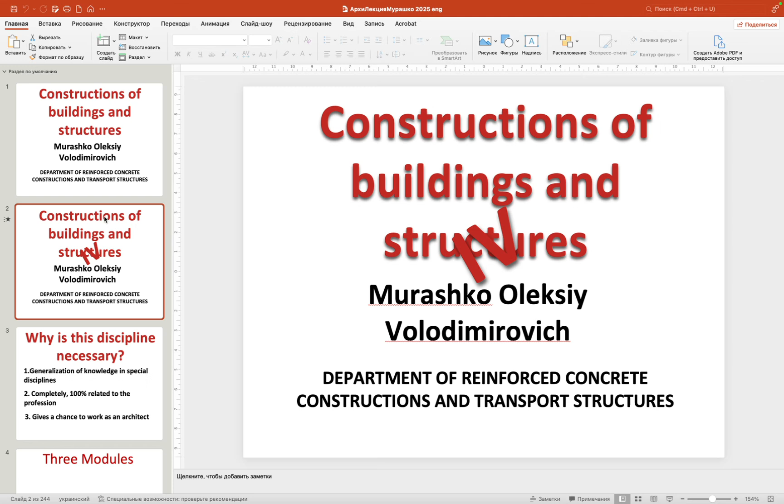And we have started. So, first of all, it is the fourth part of material of the lecture. So, some issues that I will tell you during this course you will find familiar, because you have heard something like that during previous courses while studying at the academy. So, the first question is: why is this discipline necessary?

First of all, it will help you to collect all the knowledge that you have in the structural direction together. It's just the generalization of knowledge in special disciplines, and it will collect all the structural disciplines that you have already considered, like strength of materials, constructions of buildings and structures, part one, two, three, etc. So it will help you collect the general volume of knowledge with which you will be able to work as a real architect, not only as a designer.

Also, it is completely 100% related to the profession, because all the issues that I will consider during these lectures are connected with real life, with practice. Some questions you will find hard to understand. It will be difficult for you to understand why an architect needs to know how to work in circumstances where you have to design the building in seismic regions or proof against landslides. But all these issues, like landslides, seismic regions, or, for example, undermined territories, are a part of our practice.

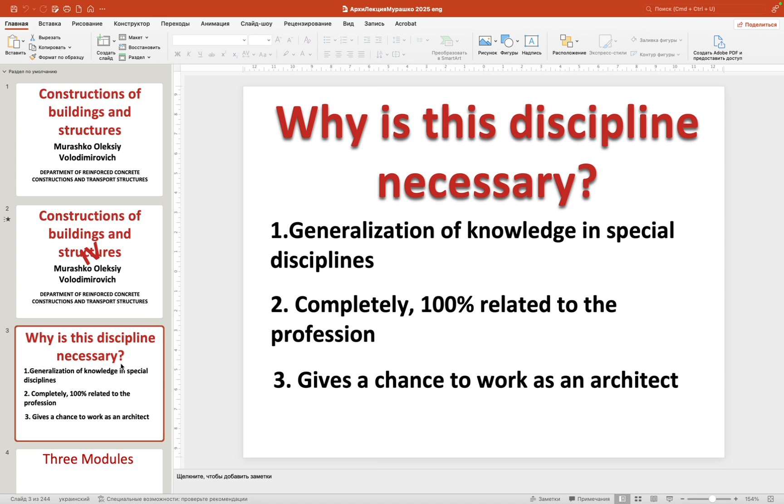So that is what makes my main architect a real architect, not just a creator of good pictures. So for you, when you work as the main architect, you have to be informed also in engineering and in structural elements, and including all this information, you have to create a good picture which can be implemented in the way you have described it on your picture.

So all my discipline will consist of three main modules. The first module will be devoted to construction solutions for residential, public, and industrial buildings. The second part will be devoted to difficult ground conditions. And the third section, which is like one lecture, will be devoted to reconstruction, because reconstruction is also a very important part of an architect's life.

And right now, during the war, it is one of the most needed directions of the designer's work, because we have a lot of buildings and structures in very difficult conditions after drone attacks, missile attacks, etc. So as a future architect, if you are planning to work in Ukraine, you have to be very well informed about reconstruction.

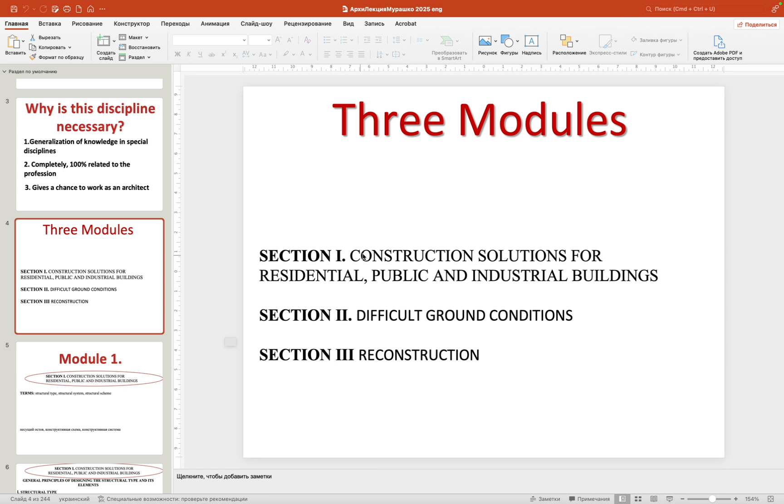So today we will start our first section, the first module, which will be devoted to structural solutions for residential, public, and industrial buildings. Yeah, the best way to write it is structural solution. So, do you have any questions for me about the intro that I just completed?

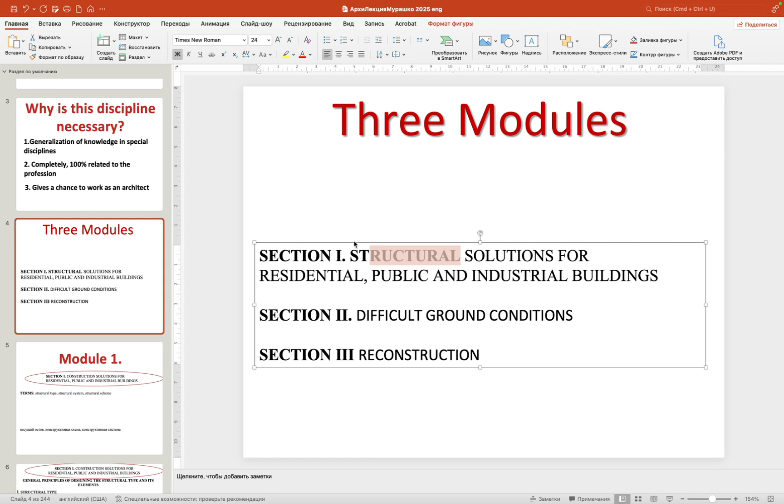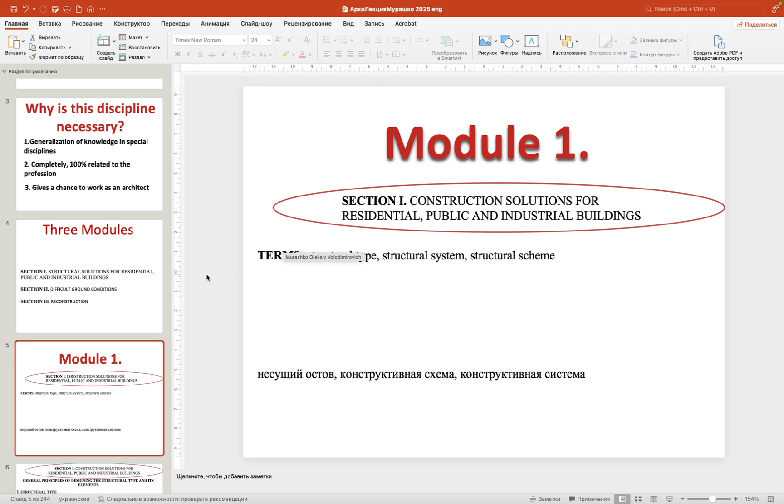The first module will start from the main terms that we will consider during our lecture, and some of these terms will sound familiar to you: structural type, structural system, and structural scheme. First of all, the structural type is a system of vertical elements like walls and columns, horizontal elements like floors, roofs, and beams, and arbitrarily oriented elements which support the spatial stiffness and geometric stability of the building. We will consider these terms further in the future.

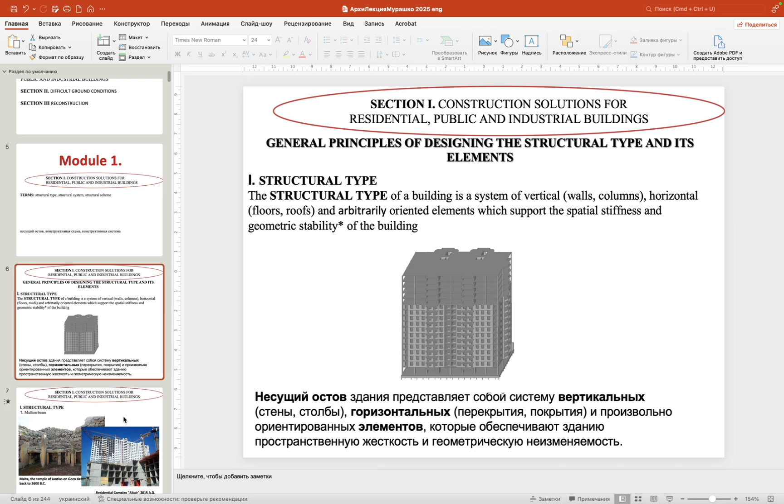And there are three main structural types. The first of them is called the mullion beam.

And if you will compare this mullion beam structural type, which was used in Malta 3.6 thousand years before Christ, and the contemporary residential complex Altair, which was erected in 2015, you will see a lot in common. Yeah, we can see that the materials are different. Here we can see the limestone, and here we can see load-bearing concrete, heavyweight concrete.

But nevertheless, mullion elements, vertical elements, and beams are located in the same order. So that makes it possible for us to call all these buildings mullion beam, because this structural type consists of vertical elements and horizontal elements. So it's mullion beam structural type.

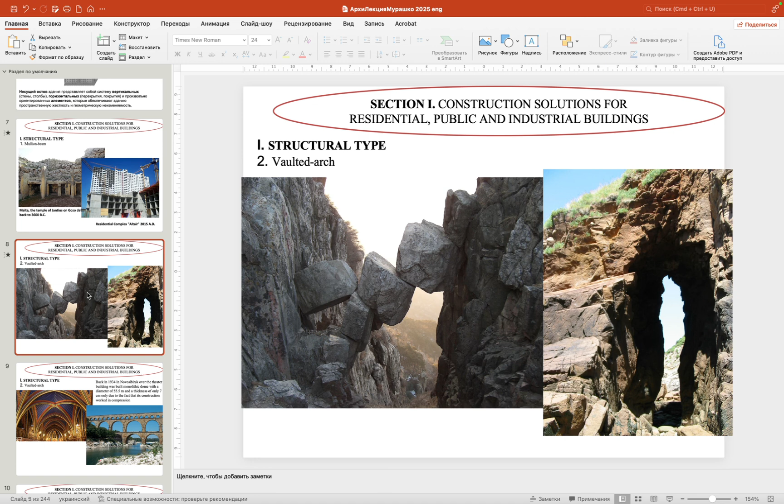The next structural type, which we will also consider during our lectures, is called vaulted arches. Sometimes we can find natural arches and vaults around us. Sometimes we can see the same ideas in various structural solutions like aqueducts and some other solutions which are used to cover religious or cultural buildings. So, mullion beam, vaulted arch, and the most modern, the most contemporary structural type, which is called suspended.

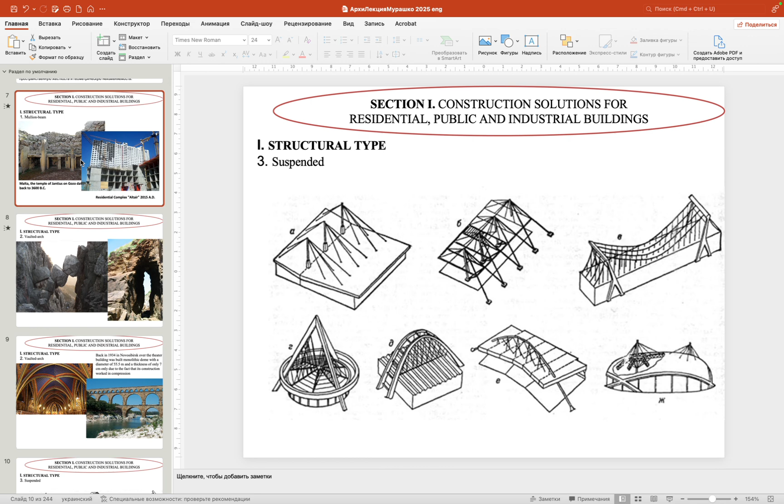So there are three main structural types, and all buildings and structures that we can see around us belong to one of these three structural types, and more than 90% belong to the first, mullion beam, because it is the oldest structural type, and it is the easiest structural type to erect, and that is why it is more widespread around the world compared to the other structural types.

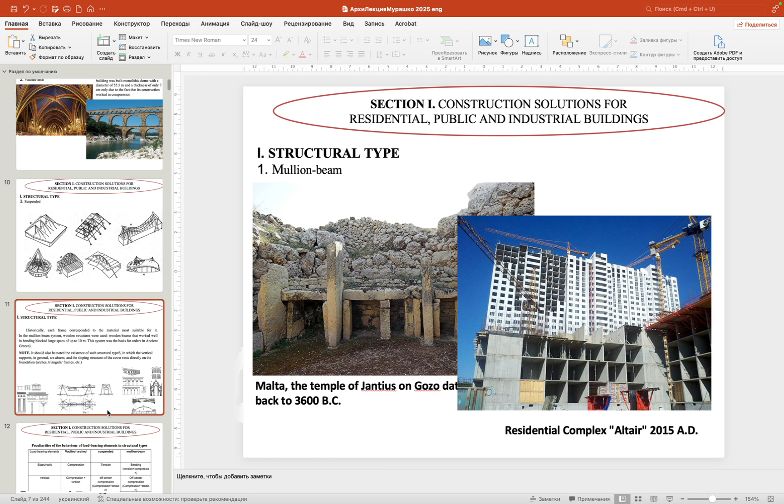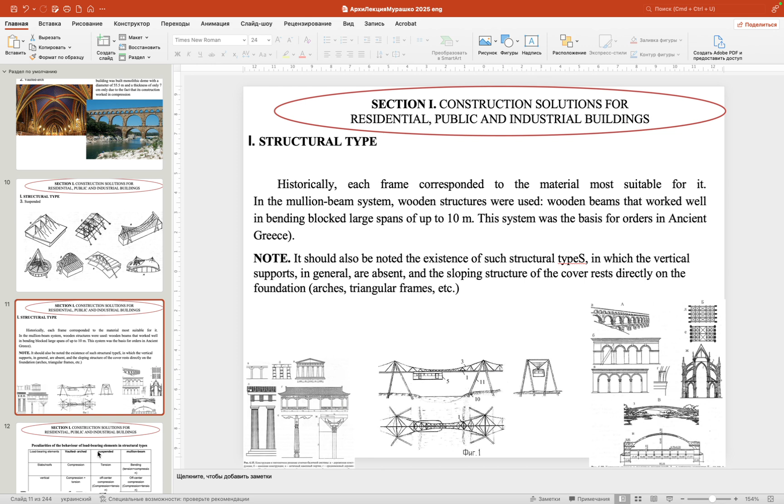So we have to analyze the horizontal or arbitrarily oriented elements which bear vertical loads, like slab and roof, and also vertical elements which bear vertical and horizontal loads. So when we are analyzing the vaulted arched system, we have compression all over these elements. That gives the ability to make these structural elements as thin as possible.

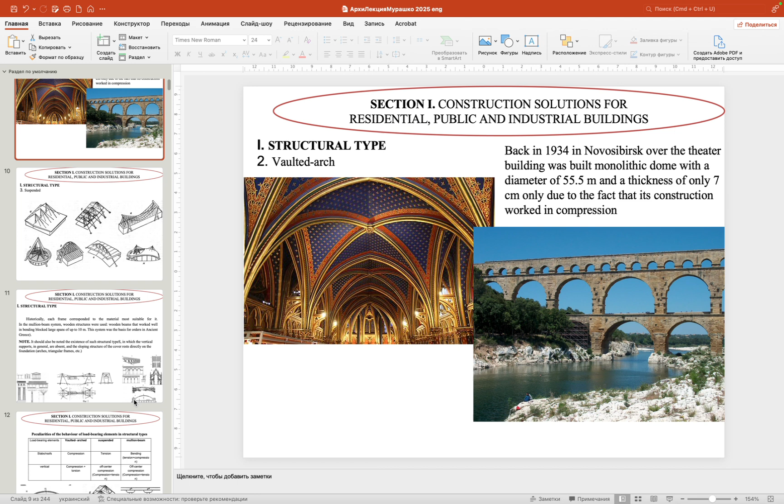Just imagine 7 centimeters in the vaulted arch structural scheme, because all the elements in the vaulted arch structural type are compressed. And if you compare it with the mullion beam element, we have significantly bigger height, like 100 times higher thickness of this element, because it is under a mixed situation where we have to deal with tension and also with compression.

So when we're analyzing vaulted arched elements, slabs and roofs of these elements are in the state of compression. When we're analyzing vertical elements for such structures, they are in a mixed situation because there is torsion and compression for these elements. When we're analyzing the suspended scheme, we have tension in roofs and slabs of this building. But when we're talking about vertical elements, we have off-center compression. It is the mix of compression and tension.

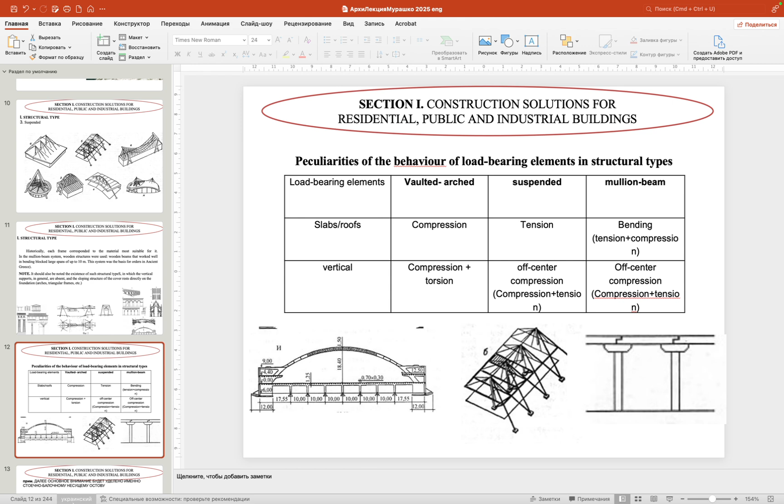And when we're analyzing mullion beam, the most widely used type, we have in the horizontal element a mixture of tension and compression. The upper part in this span is compressed, the bottom part is under tension, and the columns are in the state of off-center compression. It is the mixture of compression and tension. So the next step is devoted to the redistribution of the internal forces between horizontal and vertical load-bearing elements. So you have to understand.

And further, we will consider only the mullion beam structural type, because it is most widely used, and it has a certain simple classification. Because when we try to analyze the classification of the suspended and vaulted arched structural types, the structural schemes of these types are in a very difficult typology, and we have to analyze various dissertations devoted to this, because the buildings with vaulted arched or suspended schemes are unique.

So that is why the use of this structural scheme makes it something exclusive, with all exclusive connections, and it is really hard to make a classification of exclusive solutions. So that is why further we will analyze only the mullion beam structural type. And first of all, we have to analyze the redistribution of the internal forces between horizontal and vertical elements.

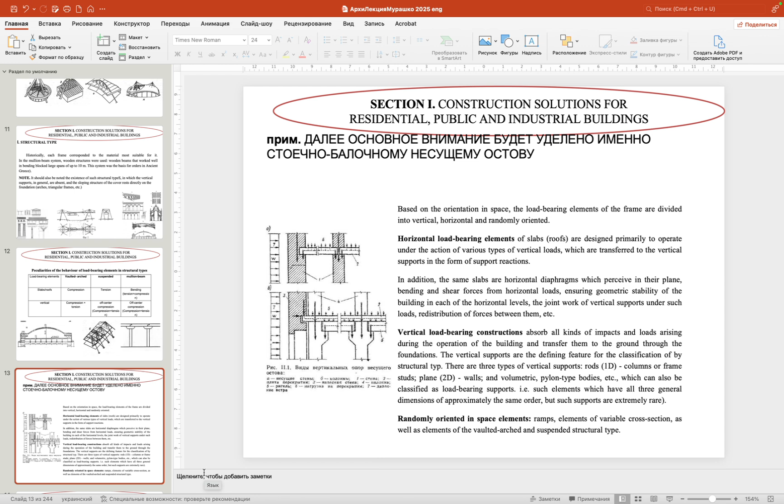And we understand that horizontal elements work on the mixture of tension and compression, it is a bending state, and they redistribute vertical load, from their own load, dead load, live load, from themselves onto vertical elements like columns and walls. And the vertical load-bearing elements absorb all kinds of impacts and loads to the foundations and redistribute them onto the ground. Also, we have randomly oriented elements in space, like ramps, elements of variable cross section, and also other elements.

So the next step for us is to analyze the subdivision of the mullion beam structural type into structural systems. Sorry, structural type. So the highest level of classification is structural type, then goes structural system, and then structural scheme. First of all, we have already considered structural type. Now we will analyze all the structural systems which are included in the mullion beam structural type.

What is a structural system? It's a static scheme of structure which is independent of its method of construction and material of the load-bearing element. So we have three main structural systems: the framed structural system, the load-bearing one with load-bearing walls, and composite or mixed. Sometimes it's called composite, sometimes it's called mixed. I will add it. Mixed because it is a mixture: in this case, it's a frame inside and load-bearing walls outside.

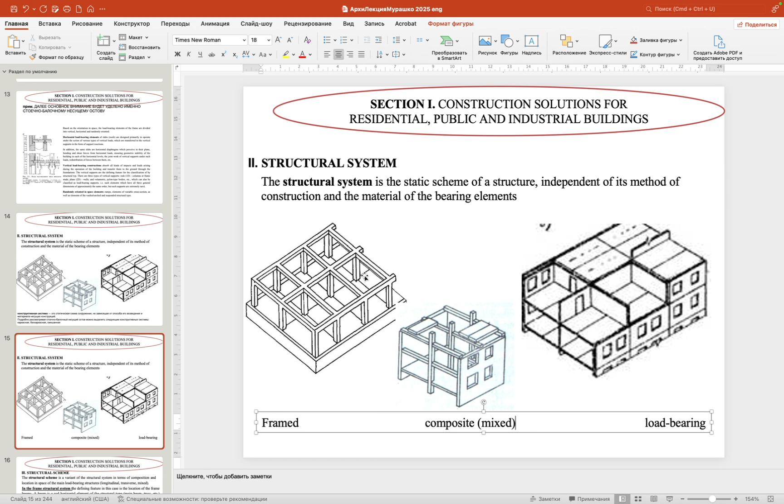And also we have an additional type of classification called structural scheme. The structural scheme is the lowest level of classification. It's a variant of structural system in terms of composition and location in space of the main load-bearing structural elements, like longitudinal, transverse, and mixed. For the frame structural system, the defining feature is the location of the frame beams. We have longitudinal orientation of the beams, transverse location of the beams, crosswise located beams in both directions, and also a flat slab without beams.

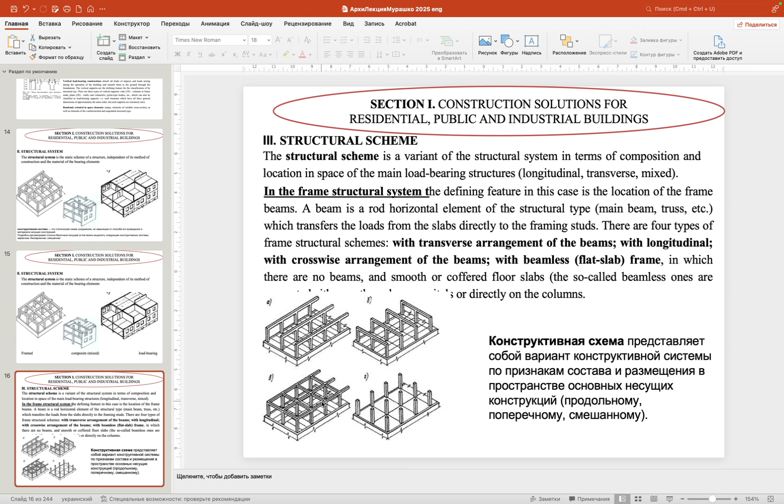By the way, when considering these structural schemes, we have to admit that the best case for us is a flat slab, because it saves interior space, it gives the ability to make flat ceilings, and it is really easy to make such structural elements at the construction site. The solutions with transverse beams are really hard to make at the construction site, but they are widely used in the case of big spans, for example, in seismic regions with spans of more than 6.6 meters we have to make beams in the slab, or when we have significant vertical loads we also have to use transverse beams.

We also have a sub-classification of the load-bearing structural system. The structural schemes for load-bearing systems are: with longitudinally arranged load-bearing walls, with transversely oriented walls, and with crosswise arranged load-bearing walls. Same idea: for frames it's longitudinal, transverse, and crosswise arranged beams; for walls, longitudinal, transversal, and crosswise located walls.

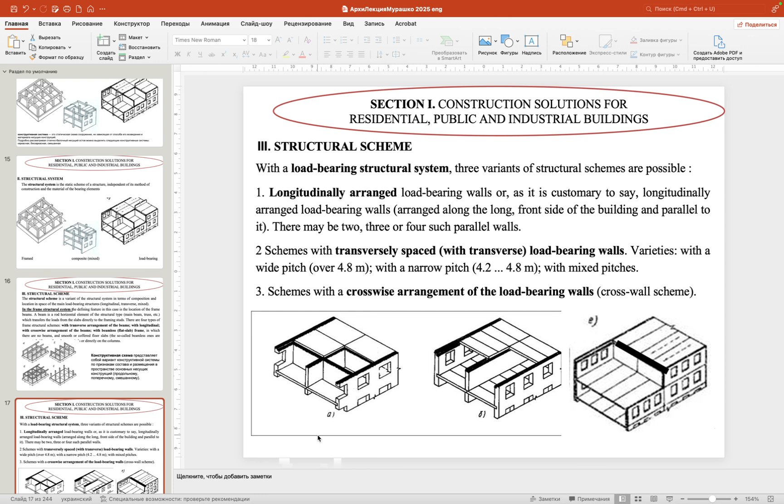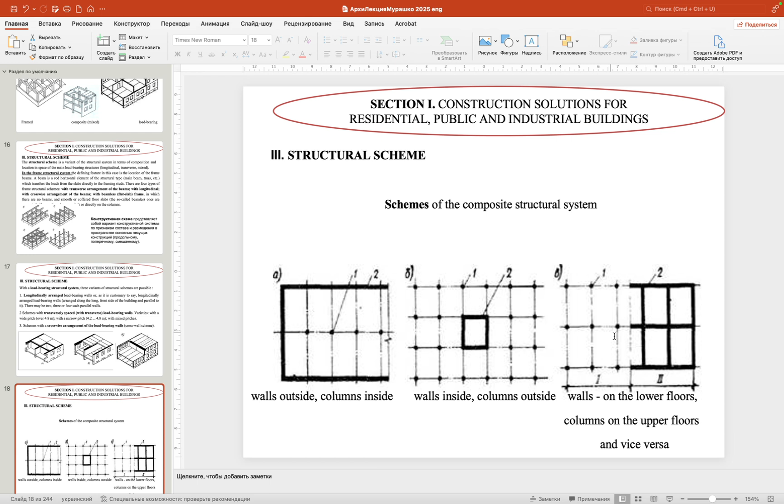And the final one, structural schemes for the mixed or composite structural system. One variant is with columns inside and walls outside. Another variant has walls inside and columns outside, and we have two additional variants: columns on the bottom floors and walls on the upper floors, and vice versa. Sometimes we have walls on the first and second floors and columns on the upper floors. This makes it possible to call this structural scheme mixed or composite as well.

The structural schemes for the load-bearing structural system are longitudinal walls, transverse walls, and crosswise arranged walls. For the mixed structural system, we have walls outside and columns inside, and vice versa, and walls located below and columns above, and vice versa. So here is the classification that you had to understand during the first lecture of our course. Do you have any questions, or is everything clear?